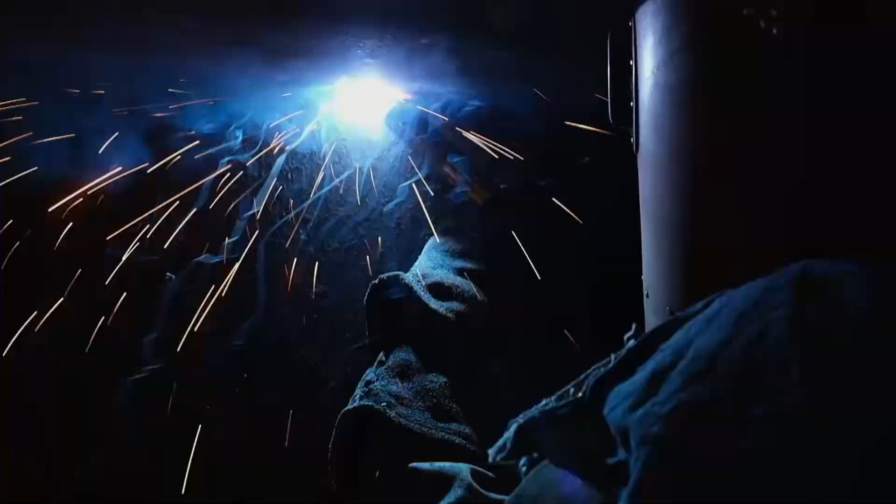It took over 50 years to select the dam site and 12 years to build it, with 3.96 million anchor cables and rods used to reinforce the world's biggest dam slope, and nearly 40,000 tons of explosives to dig the world's longest tunnel. It was also the first dam to be built on loose basalt. All in all, it was arguably the most difficult engineering project ever.

A dam across this gorge, which forms part of the boundary between the provinces of Sichuan and Yunnan, was a dream for generations. The earlier triumph of China's Three Gorges project gave engineers the confidence to do it.

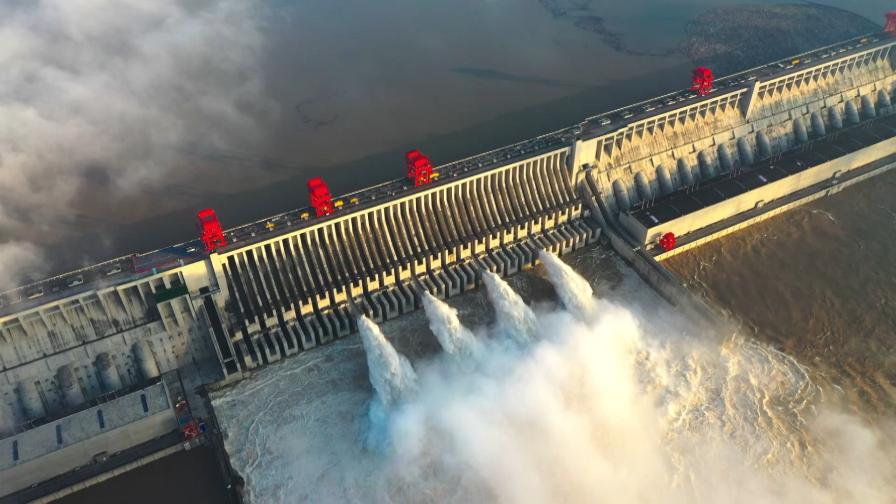The Three Gorges Dam in Hubei is the greatest hydropower project in history, the fruit of decades of designs, construction, and engineering. As well as a major national project in its own right, it was also the beginning of another engineering miracle.

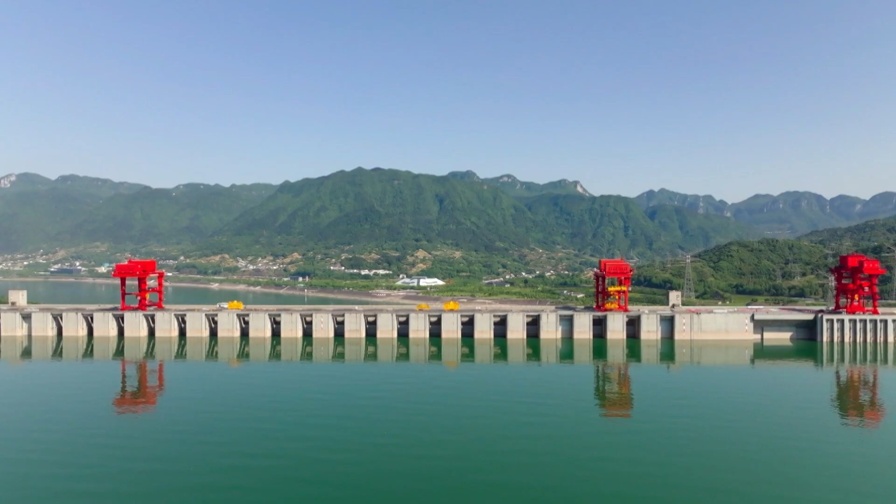Wang Julian, a senior hydroelectric engineer, has loved to push the limits of hydropower projects since his Three Gorges project experience. Over 2 decades, he has led the best team to work on the Three Gorges and Baihetan dams, 2 historical feats of engineering.

The towering 289-meter-high crest of the Baihetan Dam looks down along the Jinsha, which is the Chinese name for the upper stretches of the Yangtze River. It's proof that China's hydropower technology has reached a new peak and its energy development has entered a new stage.

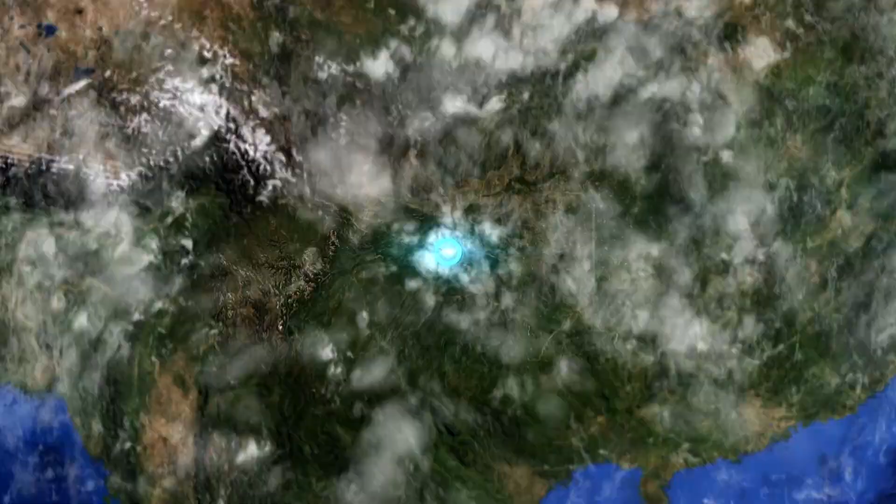When finished, Baihetan completed a network of 4 mega hydropower stations, with the Wudongde upstream and the Xiluodu and Xiangjiaba downstream. Their combined installed capacity will be twice that of the Three Gorges Dam.

Hydropower from the 768 kilometers long lower section of the Jinsha River will be fed into China's west-to-east power transmission program.

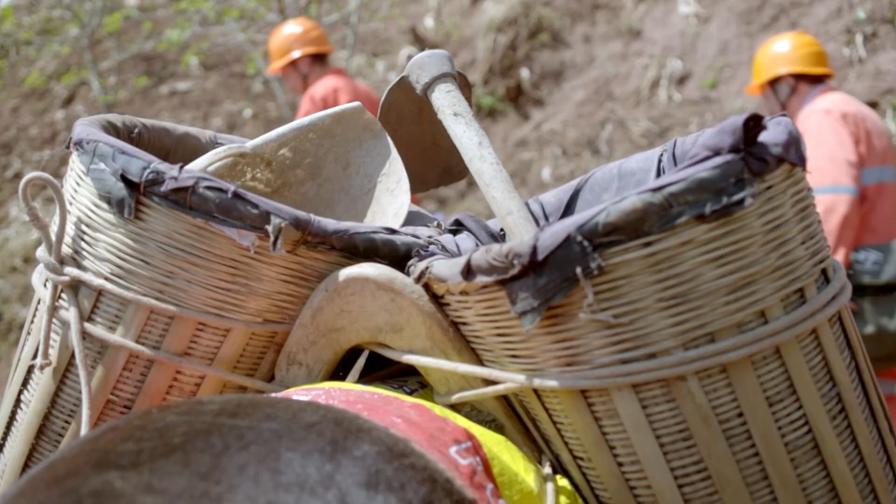Engineers in charge of the project's surveying stage still shudder when they think back to the first time they hiked trails in the area 20 years ago. The steep Baihe track along the Jinsha River was one of the routes they had to take.

In the fall of 2000, Xu Tianrong officially took over the project. He and his team were given more than 20 years to conduct multi-stage appraisals, draw hundreds of thousands of plans, write over 1,000 research reports, and finish hundreds of designs dealing with geological surveys, dam location, dam structure, and power plant installation. It was a daunting overall task.

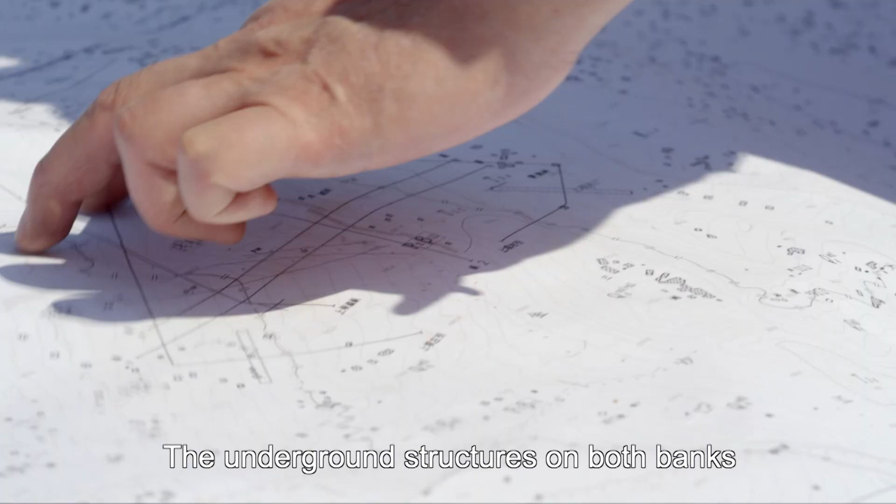The candidacy of Santan as the dam site needed more detailed geological surveys. After examining rock cores taken deep from each side of the valley, Tang Minfa and his teammates concluded the location was less than ideal.

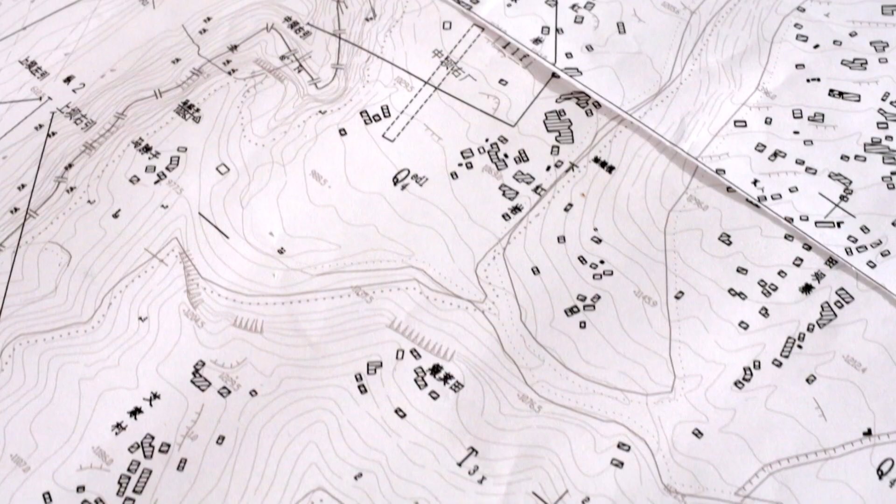With the precise location of the dam agreed on, a blueprint could finally be drawn up after half a century of effort. When completed, the Baihetan Dam would house 8 hydro-generating units, each with a capacity of 1 million kilowatts, on either side of the river. Its 289-meter height would create enormous generating pressure.

Ultra-thin with a smooth double curvature, its structure would embody a perfect combination of mechanics and aesthetics, a masterpiece of engineering.

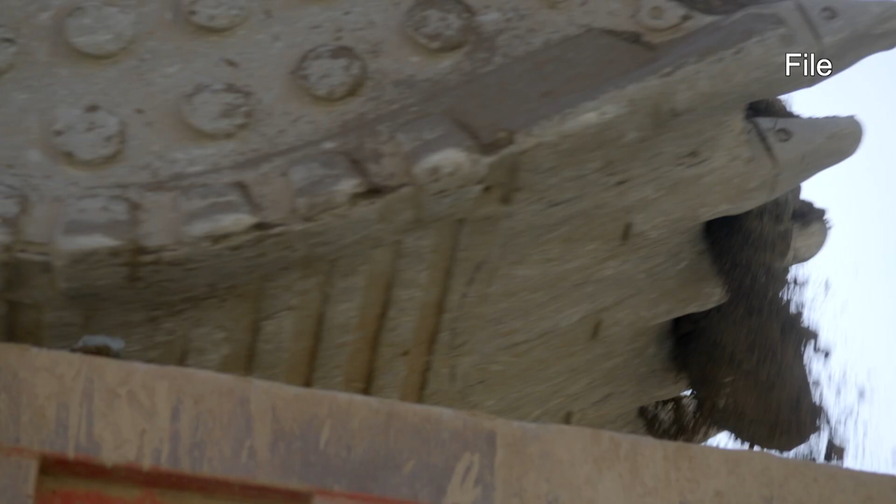In October 2010, excavation around the site officially started. While the volume of rock removed was huge, it was just one of many challenges ahead.

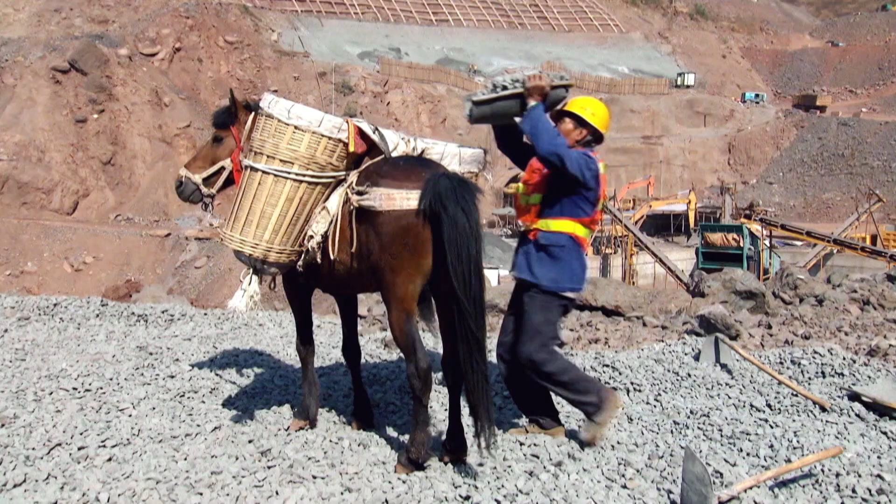The Baihetan project straddles the Jinsha River. There were steep cliffs on either side. To begin with, materials had to be transported by horse. The complex terrain and huge demand for transportation capacity were unprecedented in China's dam construction history.

Without adequate infrastructure, the mega project would never get off the ground. Zhou Chuyi's solution was bold: a comprehensive road network featuring 7 bridges.

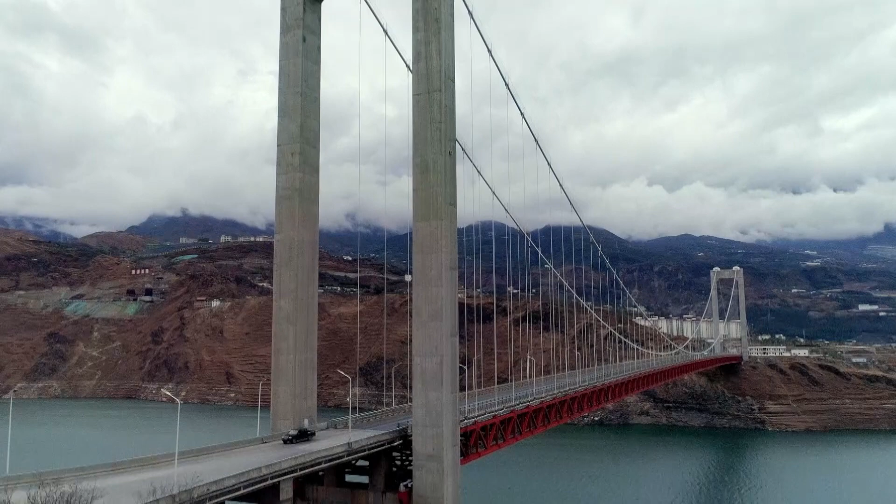Where there's a will, as the saying goes, there's a way. In 2016, the Baihetan Bridge over the Jinsha River was completed. This suspension bridge, the gateway to Baihetan, took 4 years and cost over 450 million yuan to build.

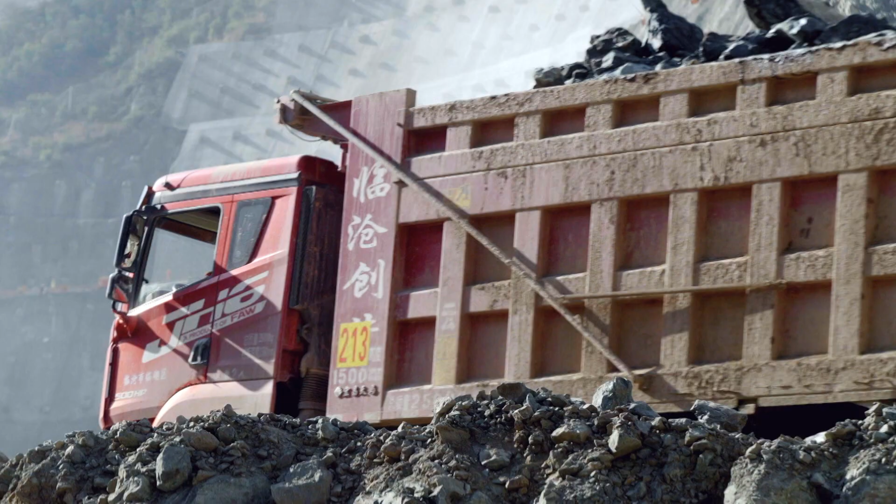Slope excavation on both sides of Baihetan was already underway, making it more urgent to build roads that could reach each construction site. The road network, which would have been difficult to build even on the flat, was much harder to complete in mountainous terrain. In addition, the overall project spanned a height difference of 700 meters.

To achieve the construction and connection of the dam and its 4 main cavern groups, Zhou Chuyi had to plan traffic in 3 dimensions to manage vertical transportation. Simply put, the challenge was to allow quick access to multiple construction sites at different elevations, with limited space available for building roads.

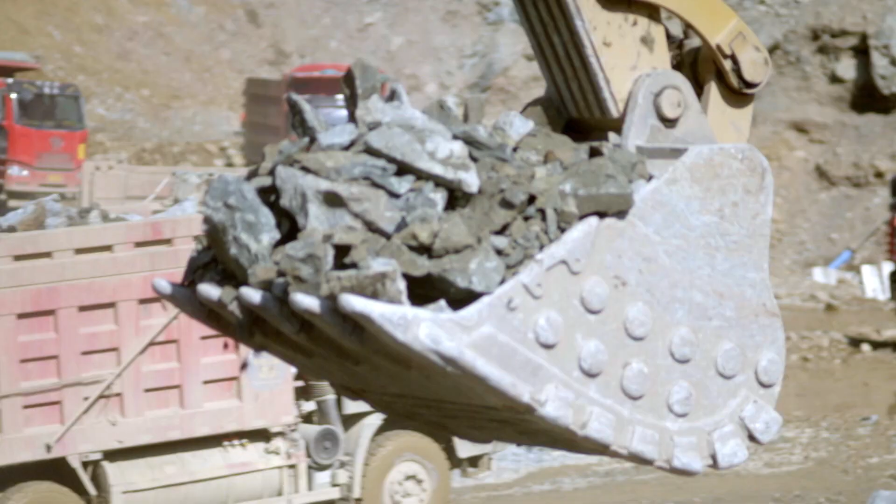Building the dam and excavating the caverns underground were a dynamic process. Fixed traffic roads simply wouldn't meet the demands of dynamic construction. Once the main project started, construction would be carried out at more than 1,000 sites at the same time. Serving as the project's supporting infrastructure, the road network had to be extensive and flexible.

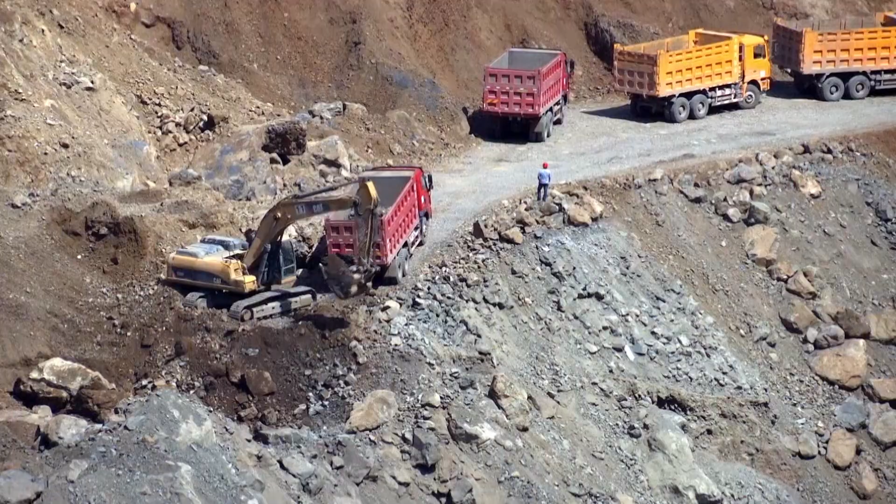The Baihetan transportation hub served over 10,000 people every day. Tens of thousands of tons of rock were excavated every day from the project's huge cavern groups before being processed and sent to a concrete mixing plant. Running 24 hours a day, the road network's design ensured a smooth flow of traffic, allowing the huge construction site of Baihetan to operate efficiently.

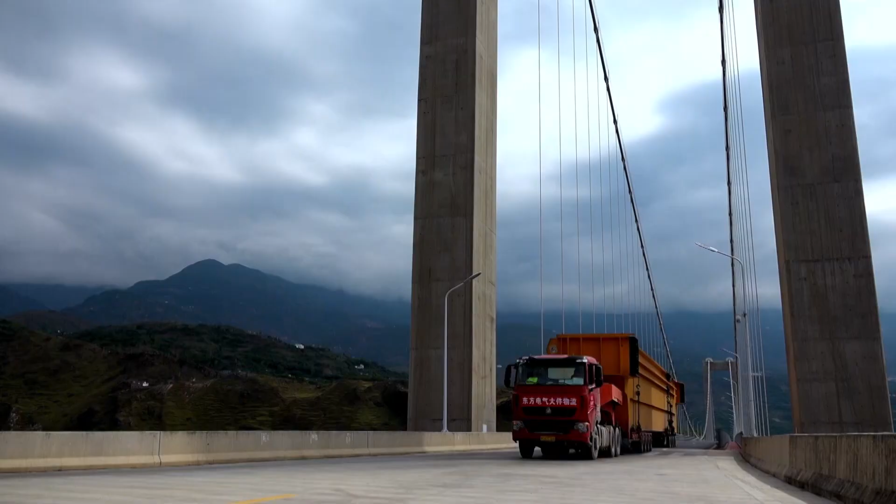Tens of thousands of dedicated workers worked hard to realize the grand plan. To set world records for the ultra-high double curvature arch dam they were building would require overcoming formidable obstacles.

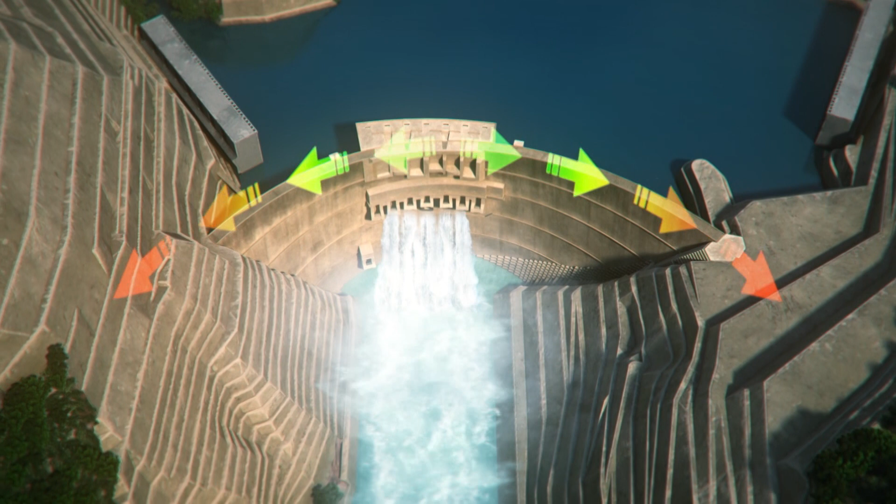In the eyes of engineers, the most elegant design for a structure achieves maximum performance through minimum use of materials. With its optimized shape for load bearing, the dam had to withstand a water force of 16.5 million tons, equivalent to the thrust of 1 million bulldozers, transmitting it to the mountain slopes on each side through the dam abutments.

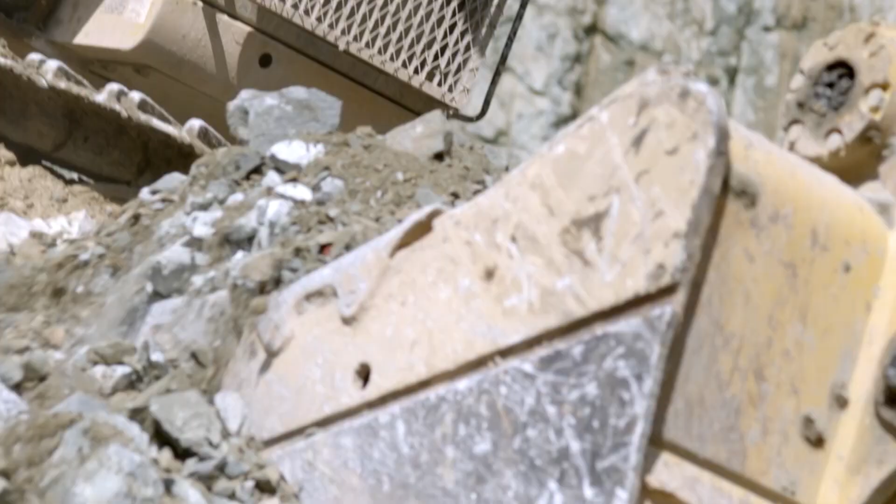Starting early in the morning, the workers climbed up the right slope. Their task was to do foundation work for a narrow and long dam abutment. This entailed excavating a 1,150-meter-long, 289-meter-high groove and carrying away enough stone to build 15 pyramids of Khufu. The right slope, with a height of over 600 meters, was almost a vertical cliff.

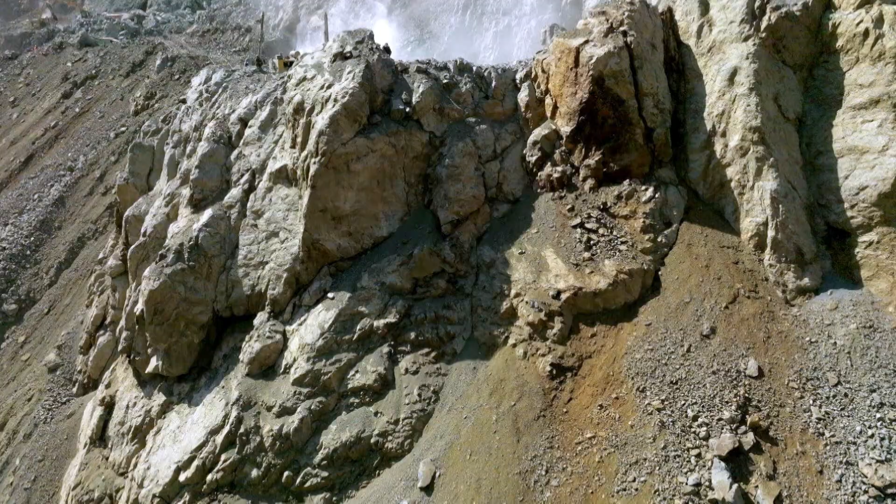Halfway up the dizzying cliff, engineer Tian Wenfu had to constantly monitor the changes of the slope as the excavation proceeded.

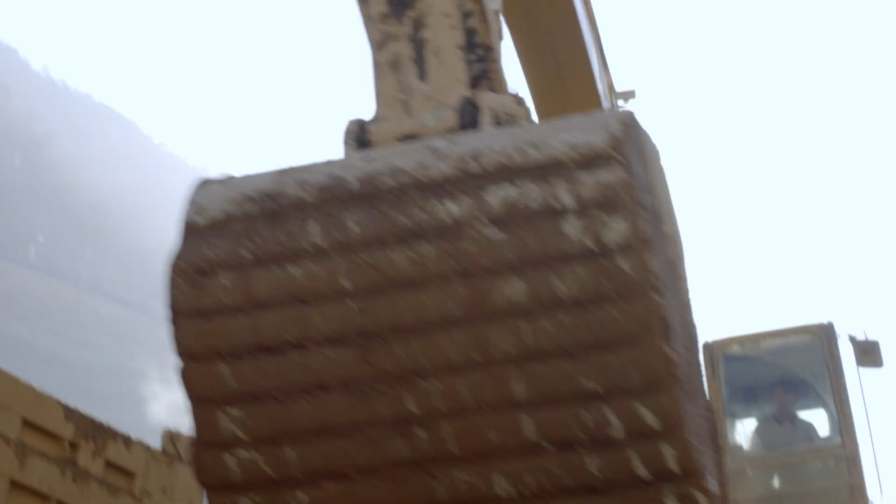The rocks on both sides of Baihetan are mostly igneous, meaning they were formed from volcanic eruptions. The engineers had to take their properties into account. When the right slope was excavated to a height of 590 meters, the columnar-jointed basalt buried in the mountain posed a big problem.

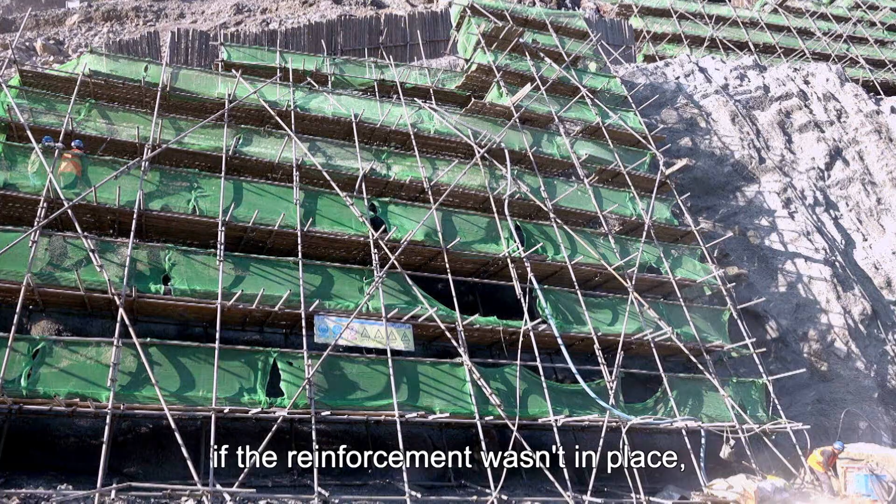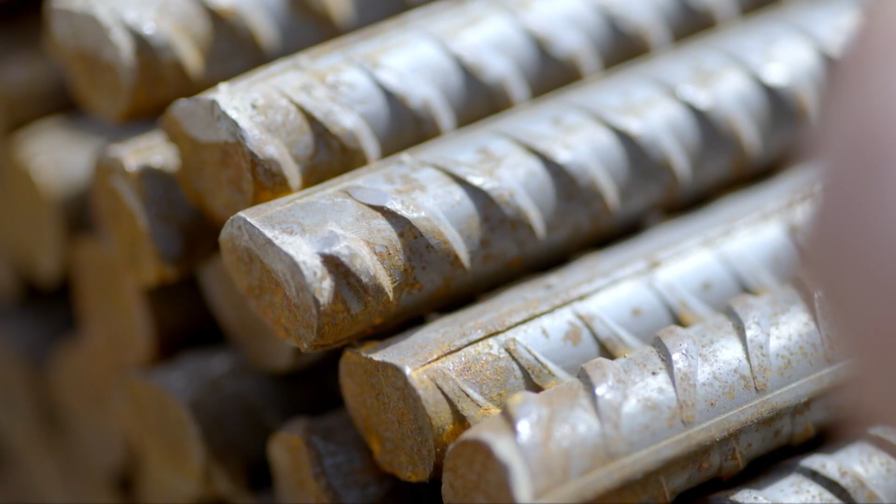Reinforcing the steep cliff would require the driving of 256,000 reinforcement anchor rods into it, an incredibly huge task.

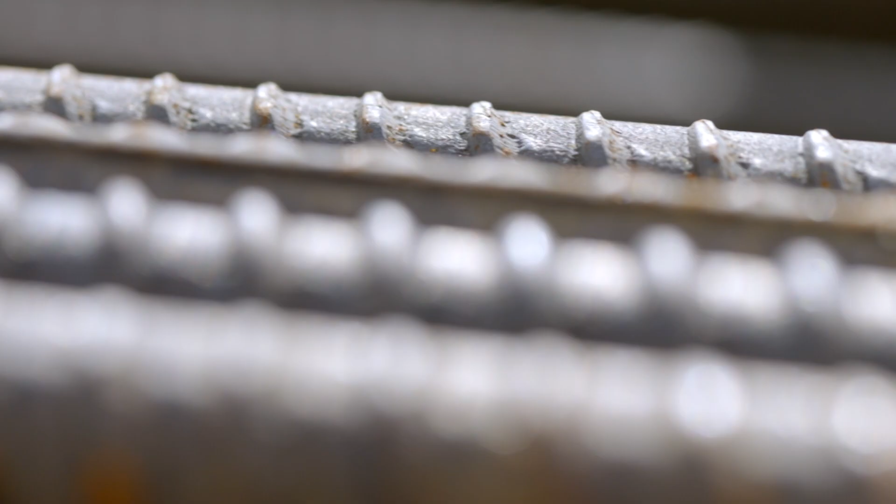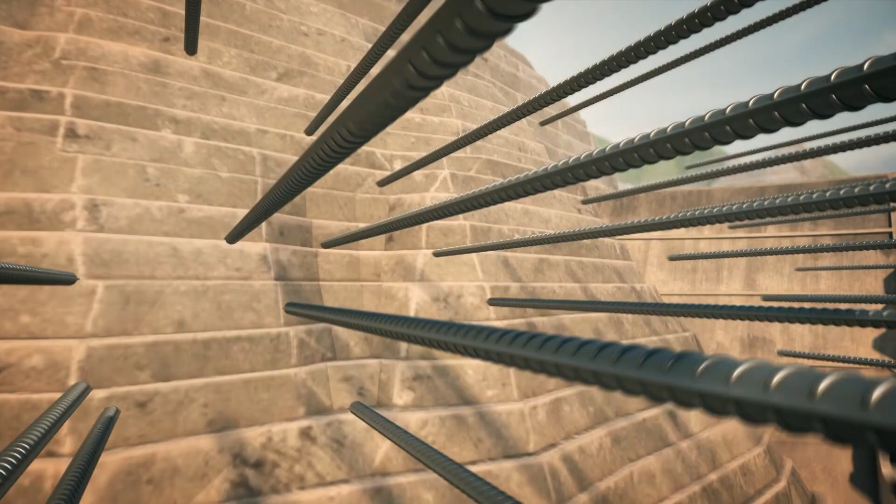Soon a fast and effective scheme was proposed. The anchor rods in the basalt layer could be stretched using external tension to pull the columnar-jointed basalt into a single mass. High-pressure grouting could then be used, transforming the loose rock layer into a reinforced rock body.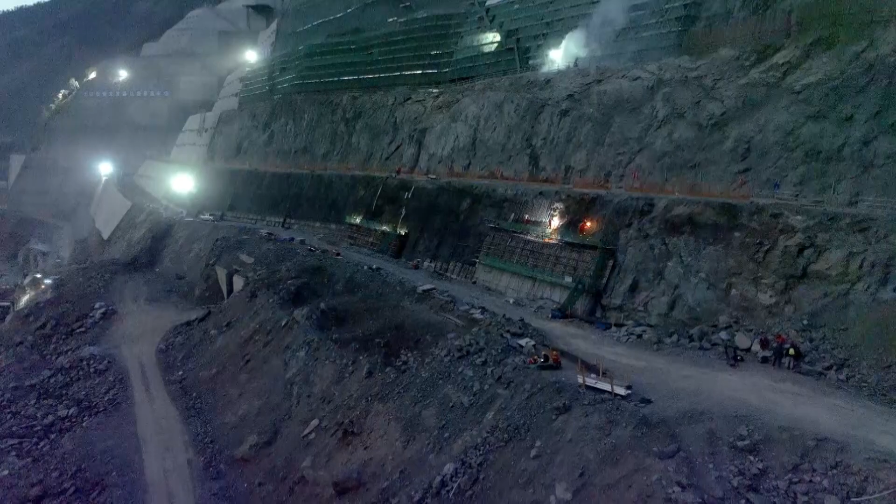The project's road network of more than 200 kilometers in total length was to include labyrinth-like underground passages to ensure that every last necessary peak and valley could be easily reached. Pondering its construction, the engineers realized the enormity of their task and how difficult completing it would be. In total, there would be more than 150 tunnels in all directions. Who could say in what order they should be excavated and where blockages might arise?

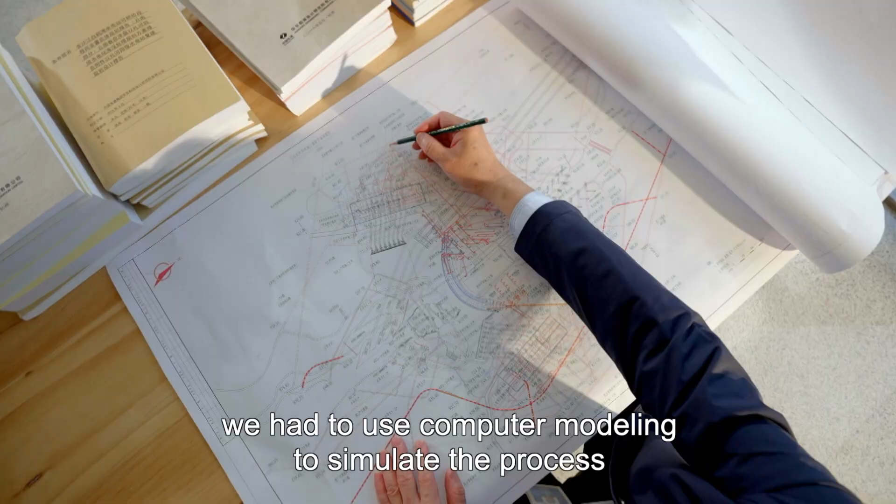Zhou Shuiyi and Yu Chu Rong carried out the traffic simulations. Their computer model was able to dynamically calculate parameters that might affect traffic and test the road network in the design stage.

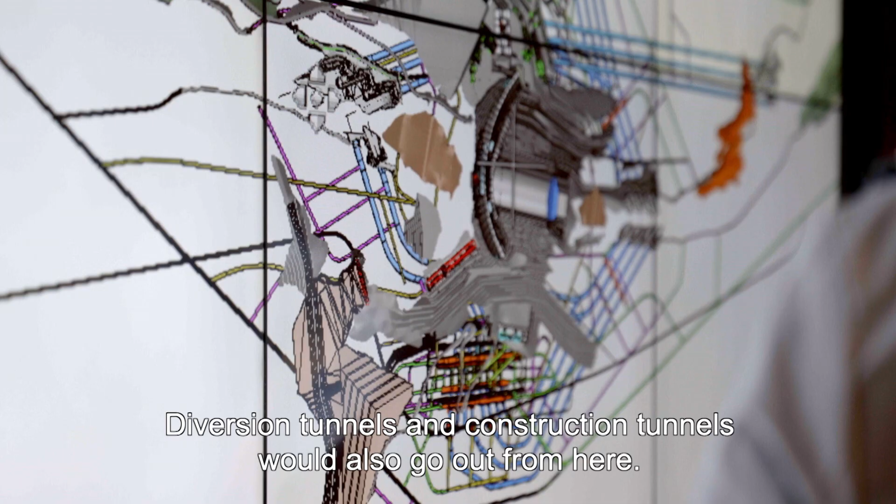To build tunnels, many factors had to be considered at once. In addition to tunnels for vehicles, the plan also included underground conduits for drainage, ventilation, and water diversion.

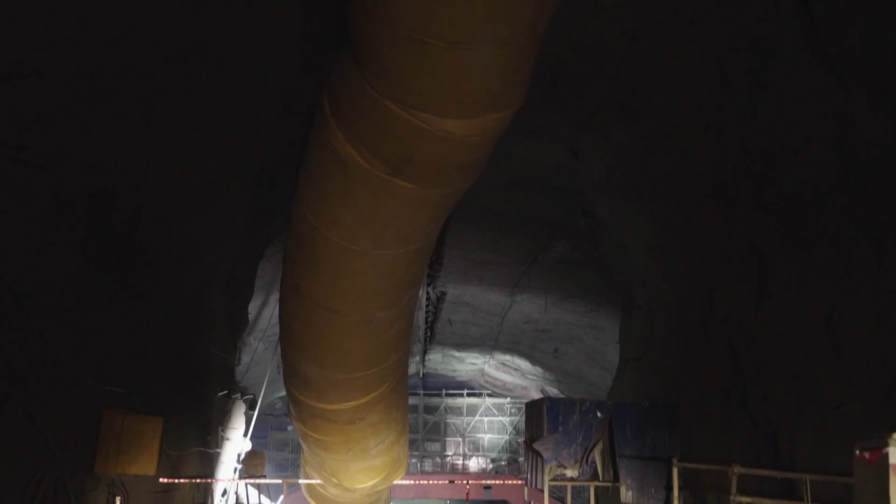Being extensive and efficient was a minimum requirement for the designers. They also had to ensure their tunnel network was safe. Smoke from blasts and vehicle exhaust, for example, needed to be discharged, while fresh air had to be supplied via ventilation tunnels to provide a safe and non-hazardous underground working environment.

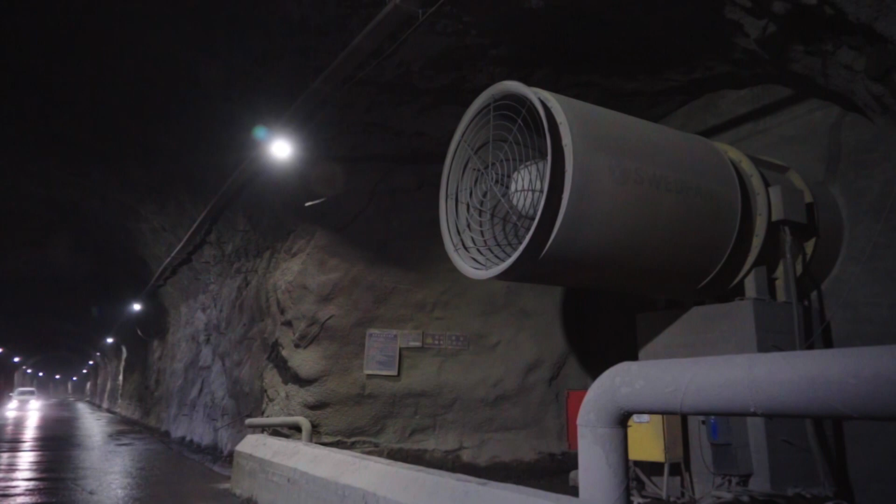According to established practice, the construction area of an underground project should have its own independent ventilation. While excavation is going on, fans pump air in to produce airflow. At Baihetan, however, the project's cavern groups were too big even for the most advanced fans. After blasting, 40 minutes were needed for the dust to be discharged before workers could enter the construction site.

If this waiting time could be shortened while ensuring the air quality, construction efficiency would be improved. To achieve such a goal, powerful fans alone wouldn't work. A new ventilation design was needed. Zhou Shuiyi's team had to find a path for the airflow.

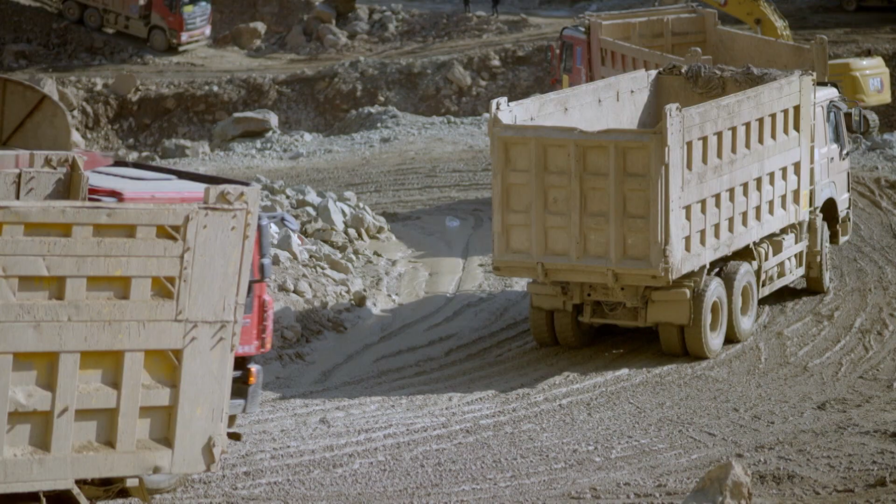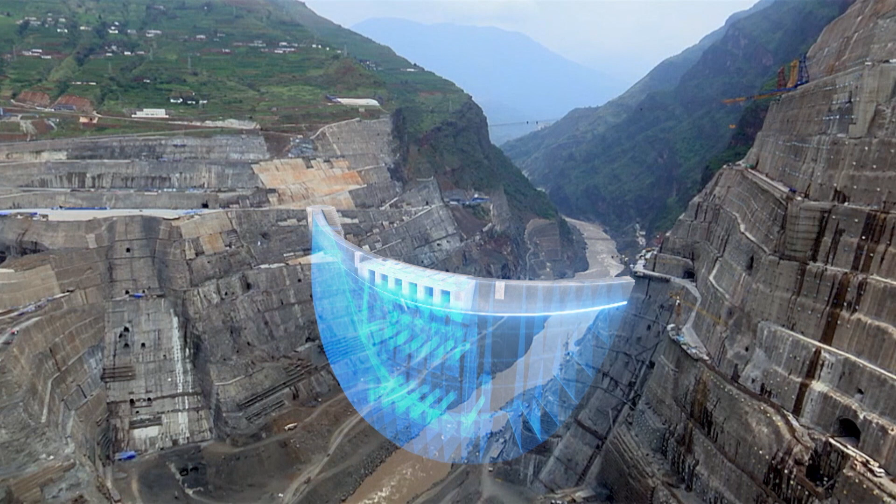With hundreds of vehicles using the tunnel network to access the deep valley bottom, the reinforcement project of the dam foundation was about to start. According to the project's design, a 289-meter-high double curvature arch dam was to be built across the V-shaped valley like an inverted pyramid. At its bottom, it would bear a weight of more than 20 million tons, the pressure equivalent of 2 tanks on a palm-sized surface. To ensure its structural integrity, the dam's foundation had to be solid and stable.

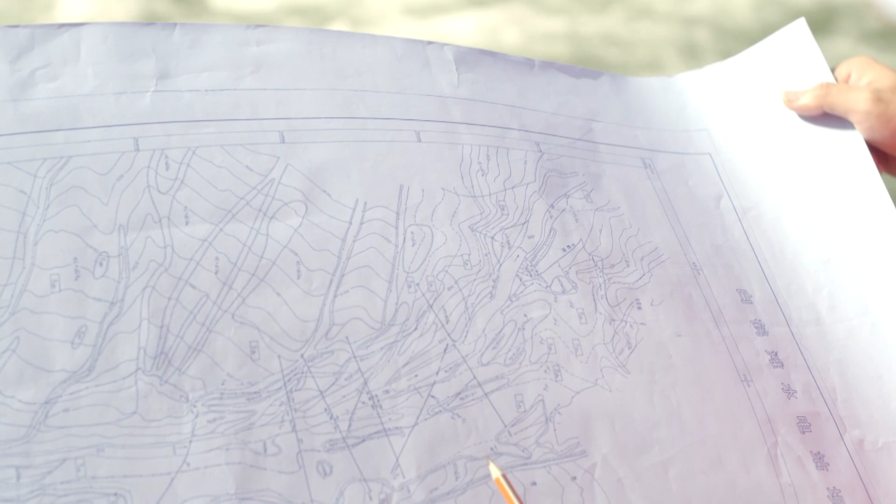Early exploration of the dam's foundation had frustrated the project's geological engineers. Despite intensive efforts to survey the riverbed, the bottom of the waterway deep down remained an unknown world.

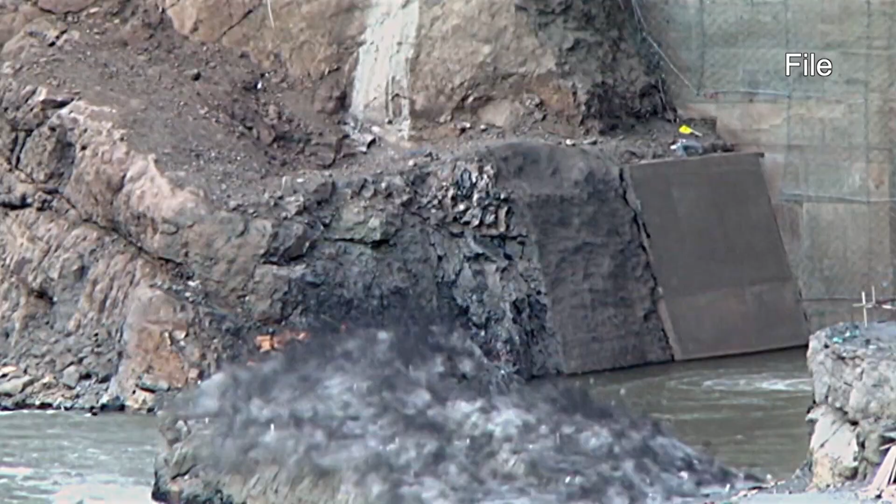Once 5 diversion tunnels were dug and ready, it was time to let the river through them. With water bypassing the construction site, the riverbed was exposed.

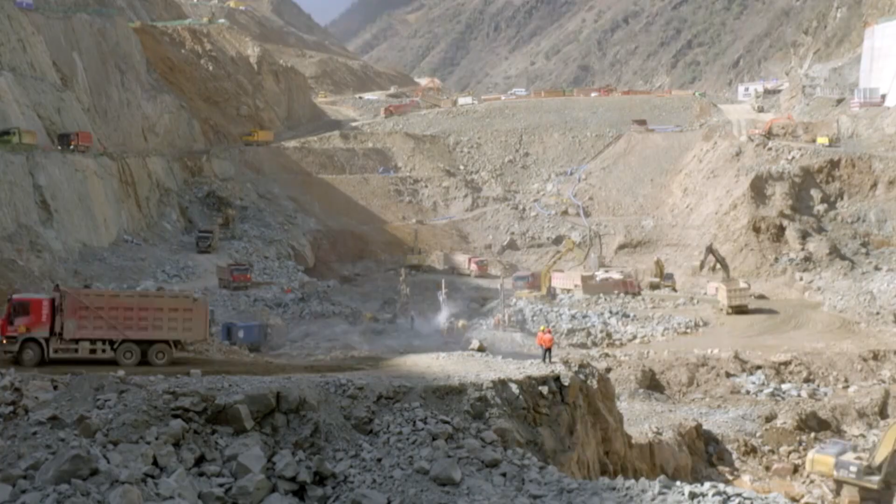Sedimentary sand and stones were removed to reveal underlying rock. It was breccia rock, formed from lava, as the engineers had expected.

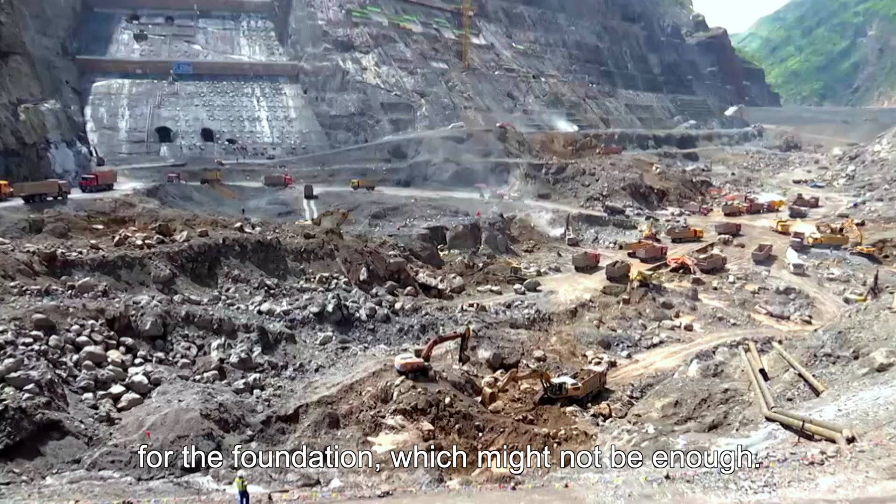No margin for error could be allowed in the blasting. The engineers had to find a way to protect the bedrock from the impact of 5,528 tons of explosives, enough to flatten the top of a mountain. Rong Yuijio is an engineer with over 30 years of blasting experience. He and his team accepted the challenge. If he succeeded, it would be a milestone in his career.

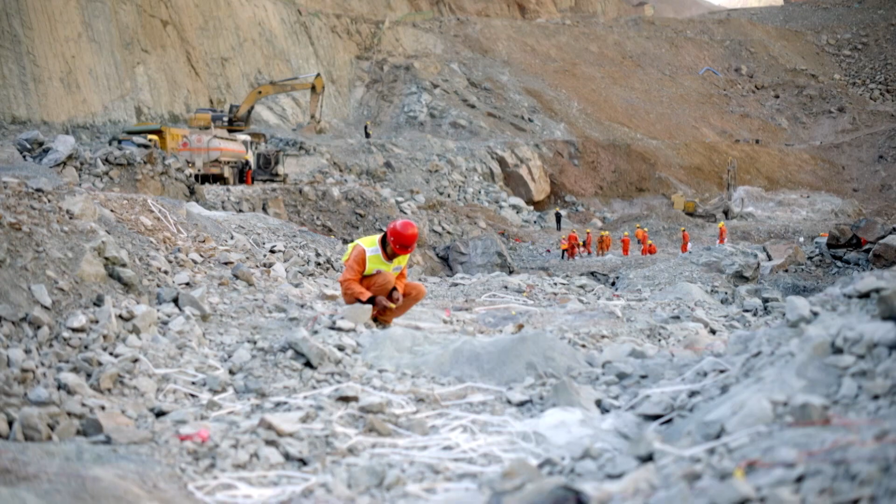To protect the bedrock at the bottom, Rong Yuijio's team proposed a composite energy dissipation blasting plan. Data modeling indicated that this blasting method would not only reduce downward impact force, but also use its reflected shock wave to increase demolition efficiency by 6 to 8 times. To confirm this innovative idea, Rong Yuijio and a team of experts prepared for 2 years and conducted over 100 experiments.

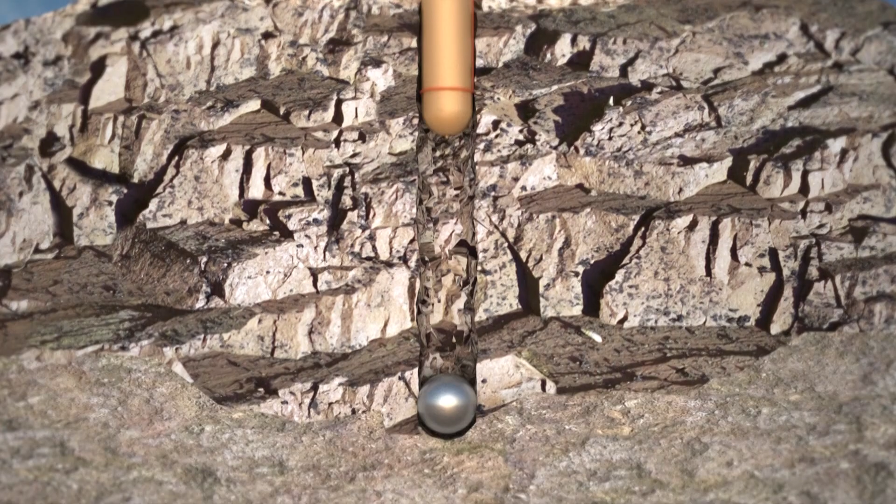During blasting, the arc surface of each iron ball serves to dissipate shock energy and at the same time reflect shock waves back, concentrating the energy of the explosion. Such composite blasting seemed tailor-made for a project like Baihetan.

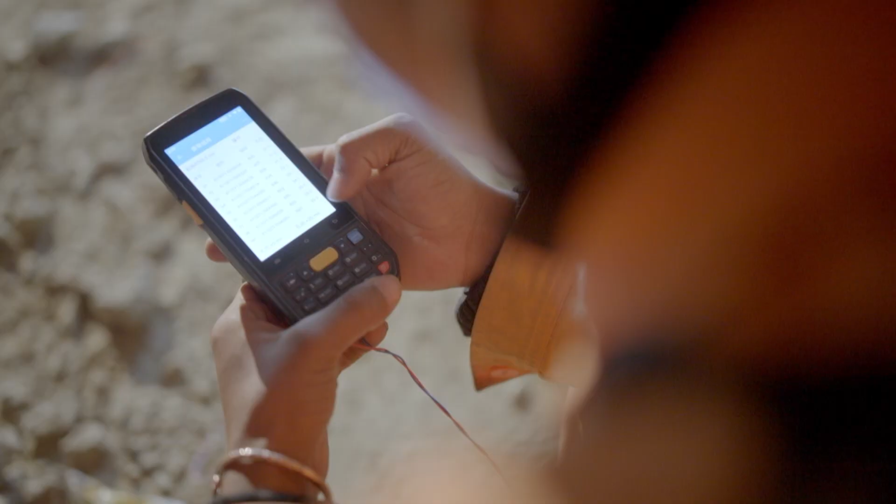The breccia lava base, about the size of 3 football fields, was covered with an 11-meter thick layer of broken rock. Now it was time to test the engineers' composite energy dissipation blasting method. With 20,000 electronic detonators in place along with as many iron balls, this was the moment of truth.

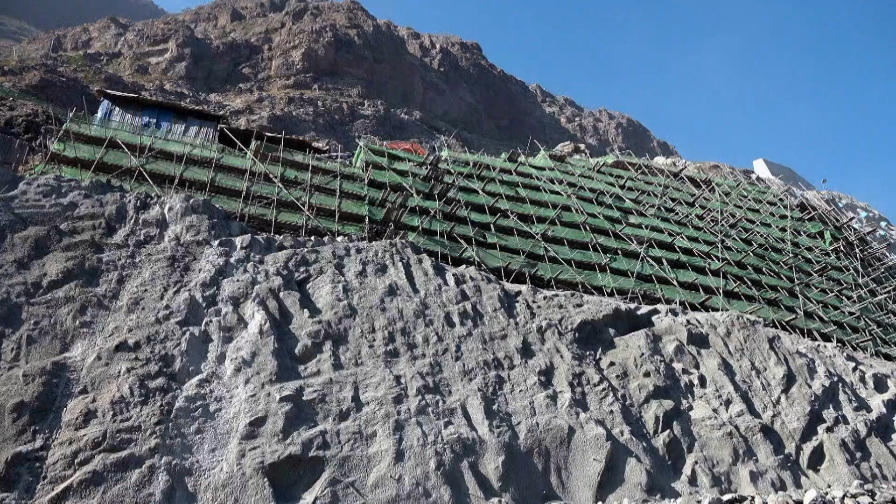Technological innovation shows the wisdom and courage of Chinese hydropower engineers who can conquer mighty mountains and rivers. While the right bank of the Jinsha River at Baihetan is very steep, the slope of its left side is gentler. The future 289-meter-high dam abutment was to extend 130 meters inward along the mountain here.

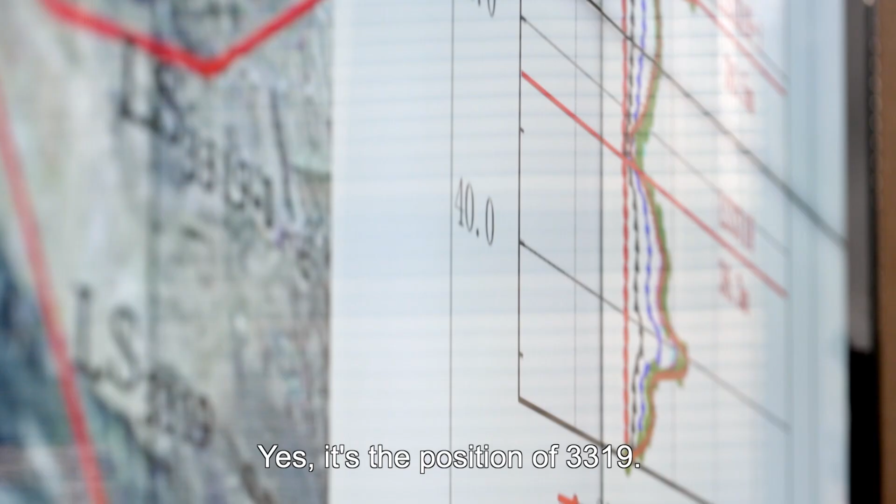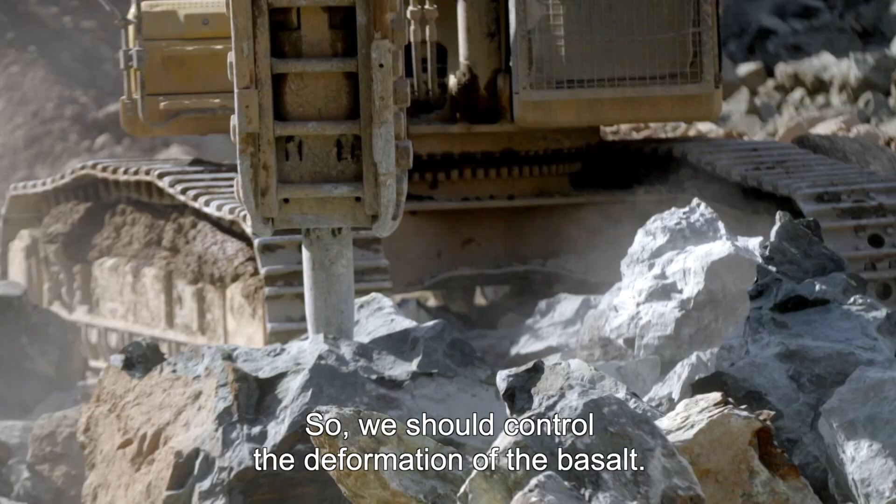The exploration tunnel the engineers dug was nearly 10,000 meters deep, reaching the heart of the left bank. The structural changes inside the mountain could be directly reflected through the monitored data.

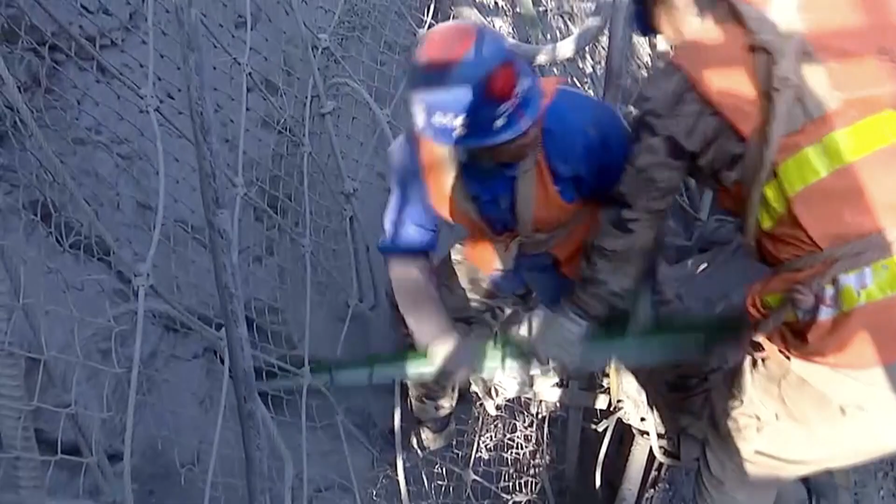Obviously, the deep excavation of the dam abutment had reached the disturbed belt. The gentle left bank was posing challenges beyond the engineers' imagination. A commonly used supporting method is anchor cable reinforcement, using steel cables to tightly hold a sliding rock layer in place. This slope reinforcement technology has been used many times in large dam projects. But supporting a slope with the same volume as the pyramid of Khufu would pose a huge challenge.

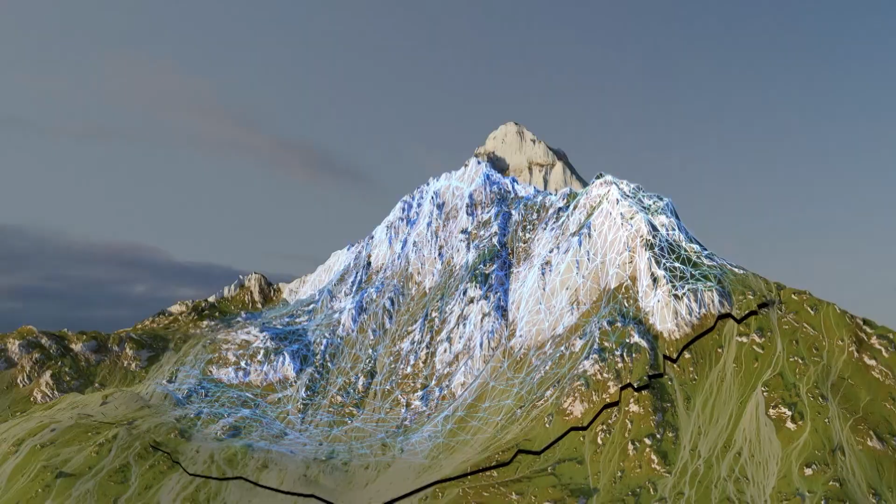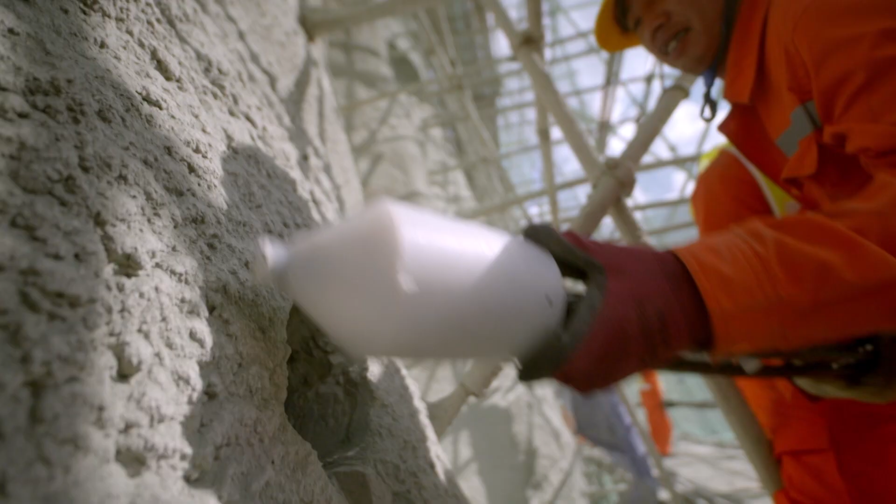Smart technologies were becoming essential in this mega project. Computer modeling was commonly used to demonstrate spatial and mechanical relationships, a feat that couldn't be achieved by floor plans. In line with today's increasingly scientific approach to geotechnical engineering, the slope of more than 1 million square meters was covered by a huge protective net. With excavation data transmitted to their terminals, Zhou Mengxia and others could then control the numbers and strength of the anchor cables digitally.

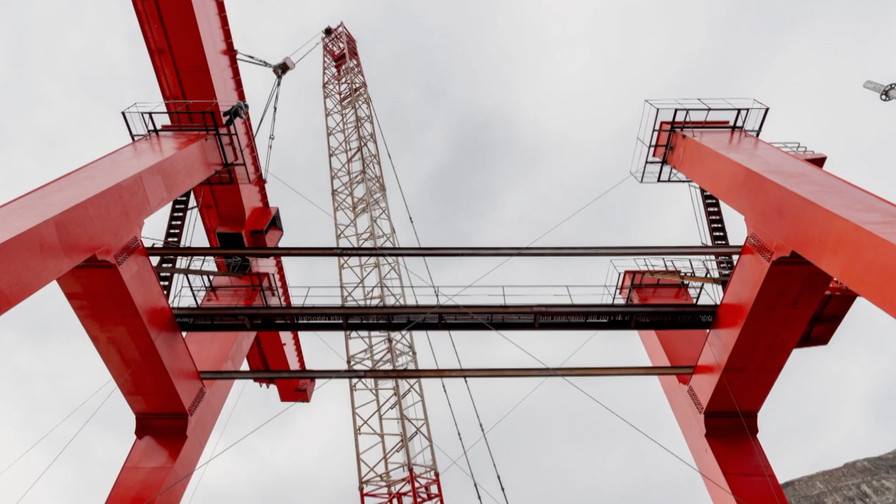Today, technology, equipment and talented engineers are essential to the building of a mega project. In the course of 6 years, engineers and technicians used 350,000 anchor cables and rods to reinforce the asymmetrical mountain slopes on either side of the river, covering slopes of over 2.3 million square meters in area with an indestructible armor. Only now could the pouring of the dam begin.

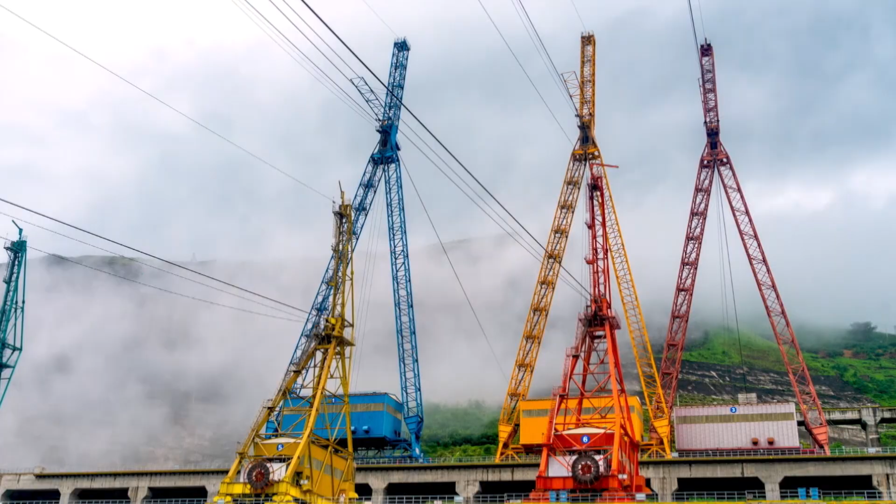At night, the construction site was brightly lit. The scene of a project on such a scale was stunning to behold. In the entire world, Baihetan was the largest and most technically difficult dam being built. Its engineers had dealt with huge, complex basalt mountain slopes for the first time using advanced technologies. And this was just the beginning. The next step would be to build the gigantic dam itself.